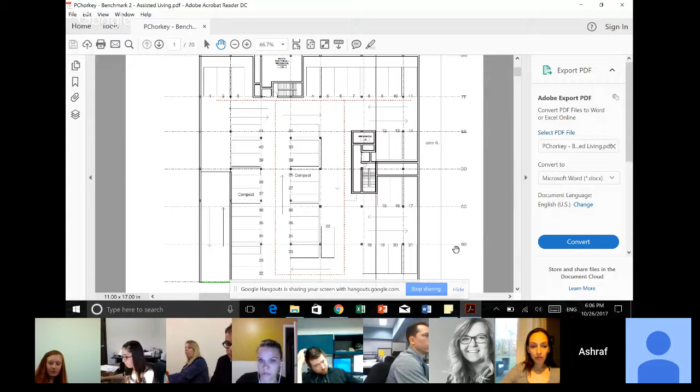Your stairs as well, Paige, don't meet the code. Please double check that you have here at least 44 inches. Your landings are very, very small. I don't think this will achieve the 44 here, both landings. It has to be almost sort of squarish. Probably I'm wrong or deceived by the scale.

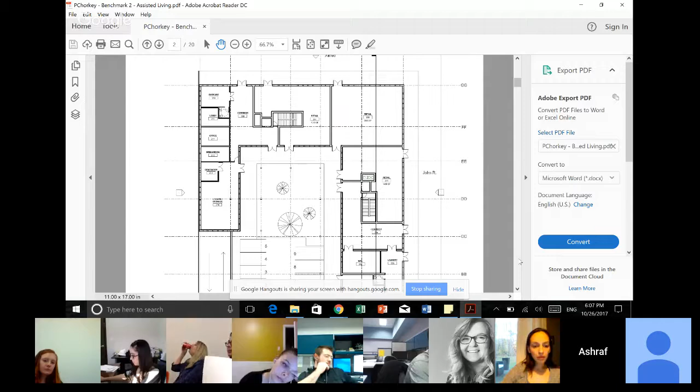The elevators are also kind of squished. I'm not sure what size they are. Just make sure that you have the minimum size, I think 4.3 by 5.8. That's an ADA: 4 feet 3 inches by 5 feet 8 inches. And I doubt these will fit in here because you have to leave some space around for the rails of the elevators. These are just some very small things, logistics.

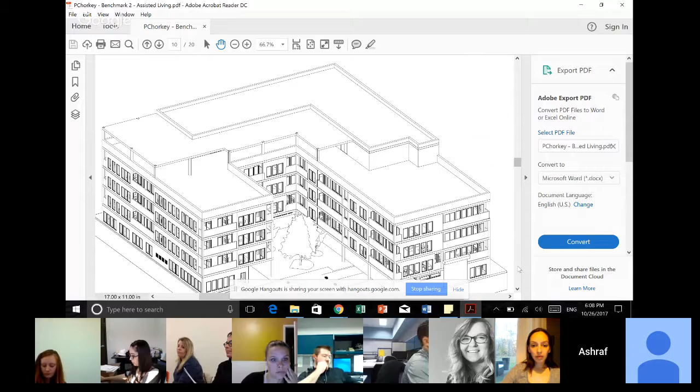Elevations, there's still a long way to go here. You have, again, to have concepts. Simply you have projection of your elevations. Thanks for the 3Ds, but again, we need to see some materiality. You do have probably the positives and negatives here, but again, you need a concept for your elevation, not just a projection from your floor plans.

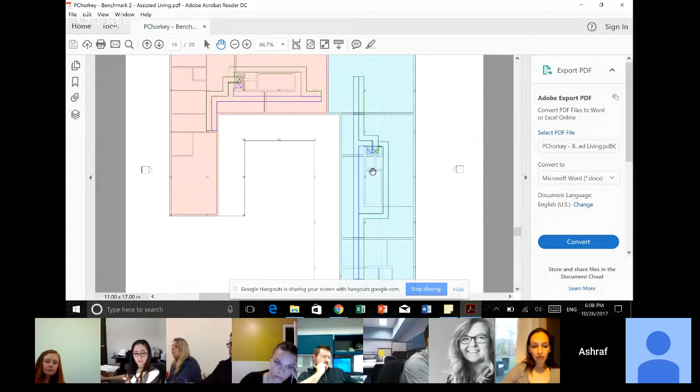I love your HVAC so much. It began to develop very well. Although again, this doesn't. Oh, this is the retail. Okay, that's fine. But we still would love to have the service ducts on the back, like this one here. This is good. Next step forward, you have here the return and the supply. I would love to see the distribution of the supply and return, but I'm okay with this. At least it works. It has your basic understanding of zoning.

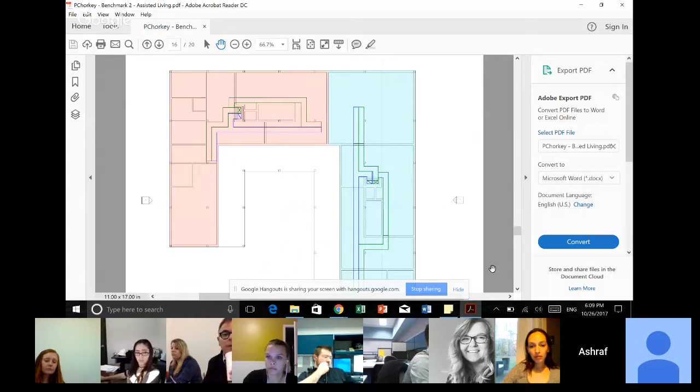You have the mechanical room back here, so you can attach the vertical shaft very well. You have an additional mechanical here on the other stair, which is great now. You had the duct on the back last time, the vertical shaft, which will not work. Again, this needs an extra to tell us how the air would go to these different units, but that's a later stage. At least you have the basics.

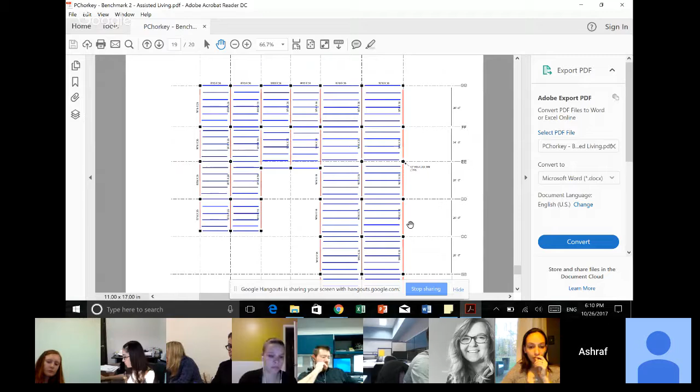Well, we have two trends here when we do a structural floor plan. If your owner is greedy, you end up having different sizes for different spans. If your owner is okay and you do your job by being a really excellent designer and your bays are kind of close to each other, yes, we can make it one beam like what you did here. But this is unsafe. If you divide 28.6 over 15, this will give you W22, not W16. So please correct that.

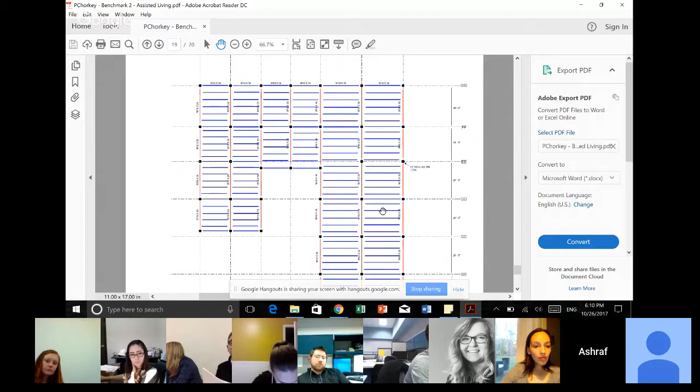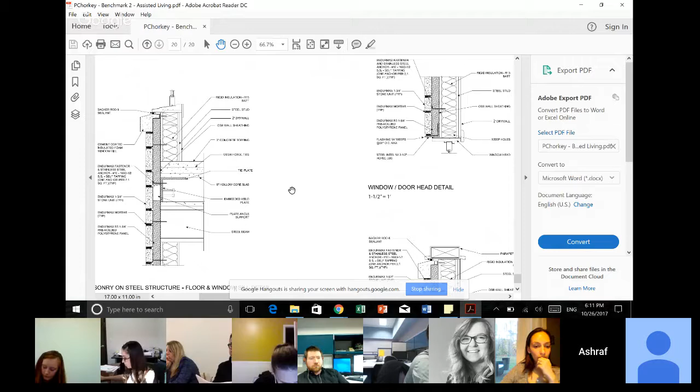That's the sections. They are much better, Paige. I love them, but you forgot the drainage space here, between the brick. Oh no, it's a stone unit. Okay, even with a stone, you have to have a drainage plane. It's 1 inch by code. However, all the masonry institutes here in Michigan and the United States recommend more than 1 inch, possibly 1.5 or 2 inches. So you don't have a drainage space here.

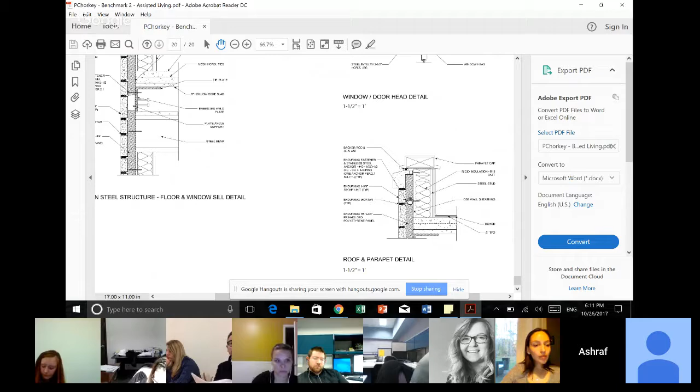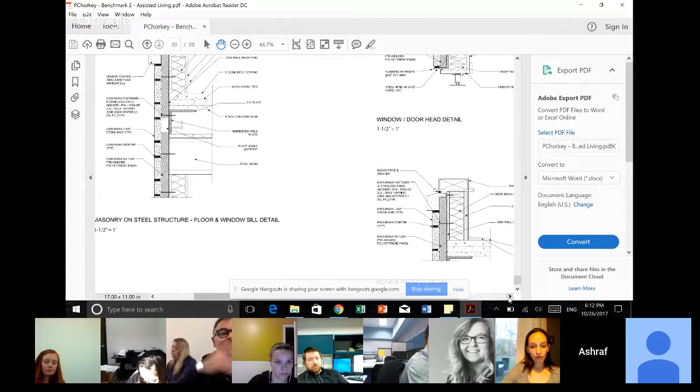Your parapet needs to cover, you're gonna have a lot of snow accumulation here. So this needs to cover the membrane from here and go all around to cover the stone. Are you with me? Yep. Okay, so these are just very quick comments, but they are way better. At least they show the structure, and above it there is the concrete slab, and I see here the tee plate, very nice. But again, please put back the drainage space and try to fix this parapet here. Thank you.

Okay, so yeah, I have. Can you hear me now? Yes, but yes and no.

I just want to be clear, a stone veneer building. Is that really what you're intending? It's not something that we maybe talked about in the earlier iterations or discussions, and the rendering of the building doesn't necessarily talk about that. It doesn't really talk about that in the elevations. It looks more like a metal panel construction.

I guess I'd say that there are doors missing in the stairwells, in those lobbies for the stairwells, and the wells aren't really sized correctly. Those little things, and some other little things, I think you need to add to the drawings.

And if this is a stone building, then there's going to be a whole sort of campaign of mortar and control joints and maybe expansion joints. So as you move into the next stage of drawings, these elevations need to describe that. The elevations are actually fairly generic in the sense that they lack specific information. Also, the balusters and the guardrails at the balconies should define what they are made of, and what they might look like.